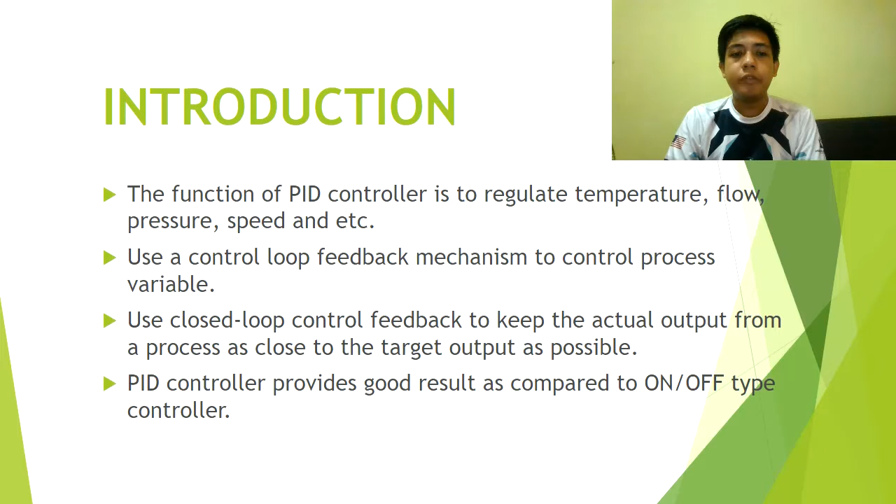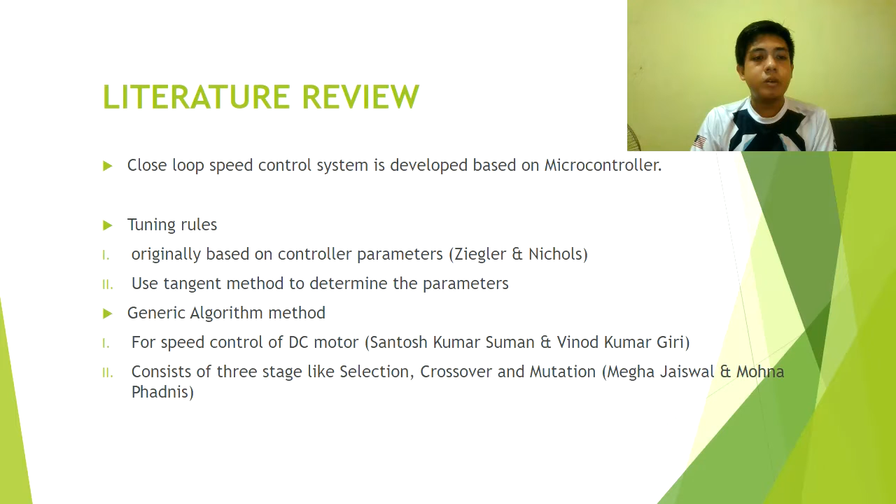The genetic algorithm method is used for speed control of DC motor and it consists of three stages: selection, crossover and mutation.

For Jaya Optimization Algorithm or JOA, this system is used for speed control of the DC motor. The JOA method can reduce the disadvantage of the traditional method, and the method is simple and does not require specific dependencies, because this algorithm is repeated until we get the best value of the parameter.

For the fuzzy neural method, it consists of four types: fuzzification, fuzzy inference system, rule-based and defuzzification. The fuzzy PID controller is used to control the brushless motor, and this method is a logical mathematical procedure based on if-then rule system.

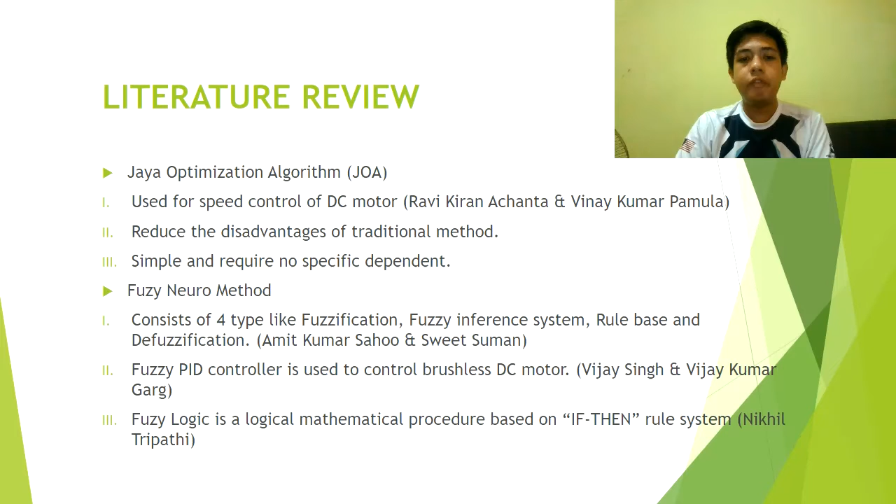The last part that I'm going to present is the problem elaboration. The group must follow this procedure in order to achieve all the objectives. The first step is we need to design the block diagram that satisfies the requirement given.

An electromechanical system is applied as an actuator in a control system for driving the blade. The next step is we need to derive the mathematical model and block diagram for the motor and blade as the load, and explain and solve the problem using control system theory, technique and concept.

Next, we need to use MATLAB Simulink to create and run the block diagram to get the result. Lastly, we must fill the table given in the instruction with the values from the results of the manual and auto tuning simulation. That's all for my part.

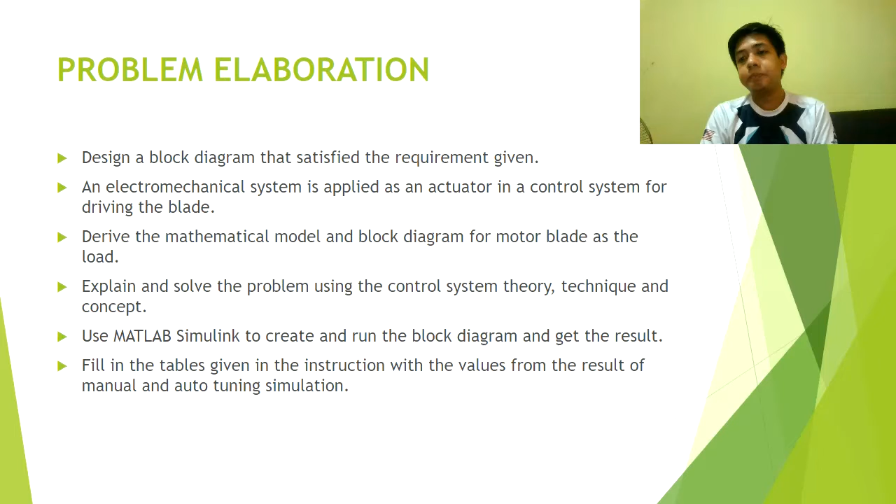So now I will present about problem execution and result. This is mathematical modeling. For the DC circuit equation: VA minus RA IA(S) minus LA multiplied by IA(S), minus ES, equal to 0.

This is the first equation, where ES is the back EMF. Since back EMF, ES, is directly proportional to the angular velocity of the motor, ES equals KB S theta(S). This is equation number 2.

And since torque is directly proportional to the current, T(S) equals KA IA(S), and this is equation number 3. Then substitute equations 2 and 3 into equation 1.

VA(S) minus IA bracket RA plus S LA, minus ES, equal to 0. Then we can get VA(S) minus T(S) over KA, multiplied by bracket RA plus S LA, minus by KB S theta(S), equal to 0.

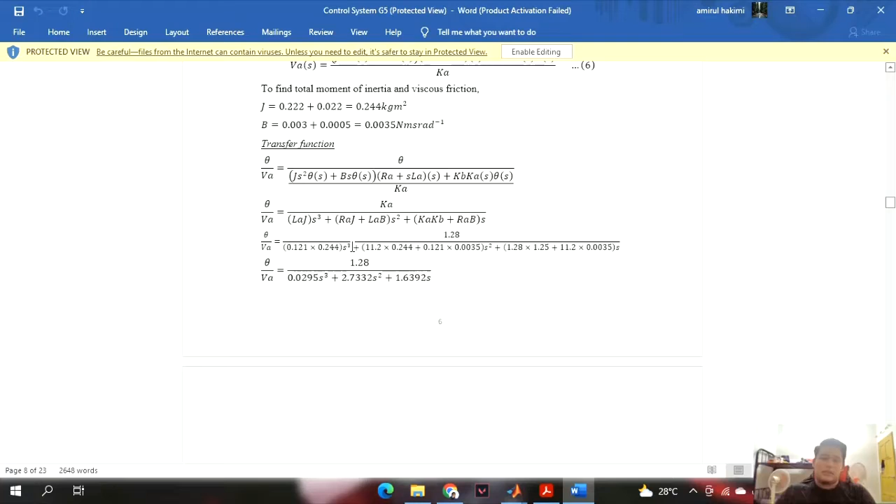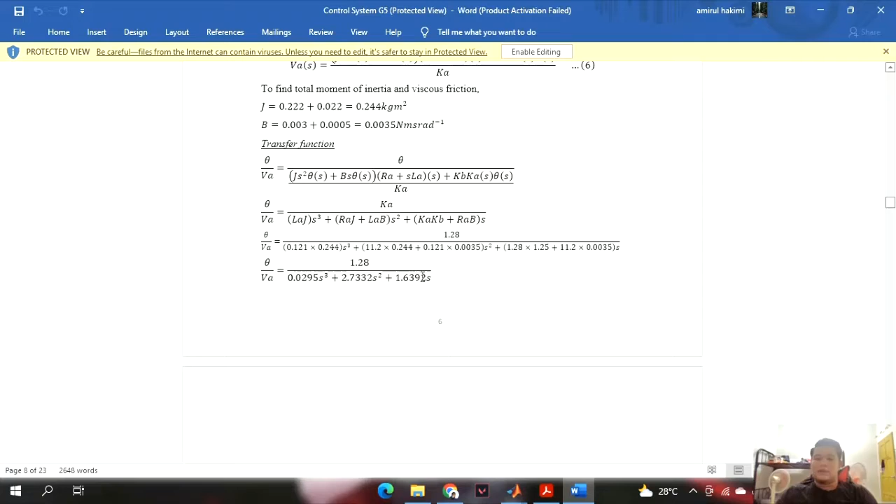After we substitute this below, we will get theta over VA equal to 1.28 over 0.0295 S cube plus 2.7332 S squared plus 1.6392 S. And this is a mathematical equation that we get.

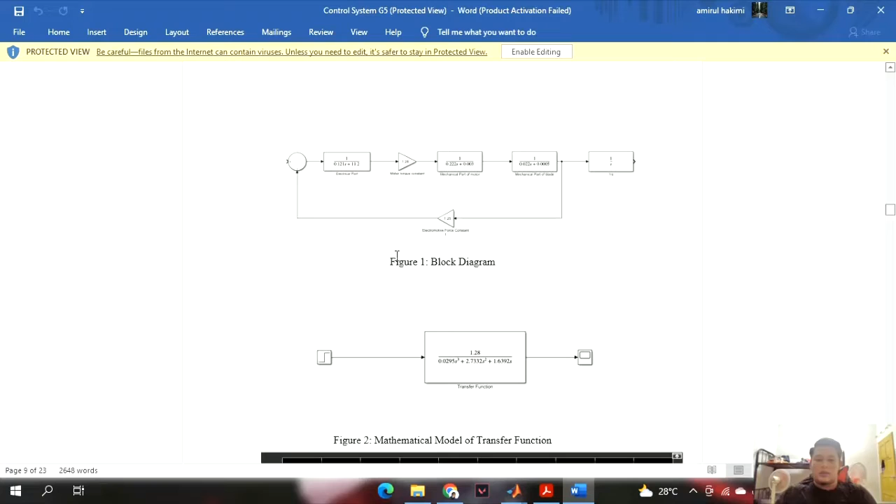And this is for the block diagram that we use in this assignment and in this project. And this is for the mathematical equation or mathematical model for transfer function, which is this is a step and this is a transfer function, and this is scope.

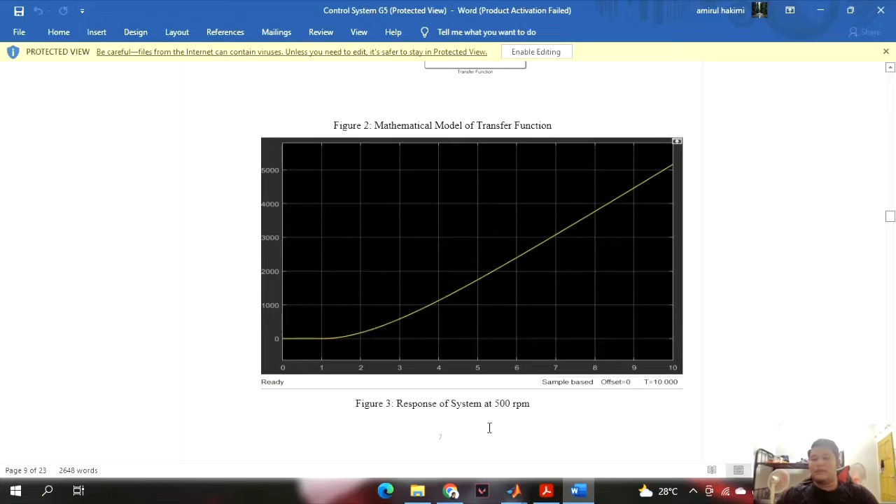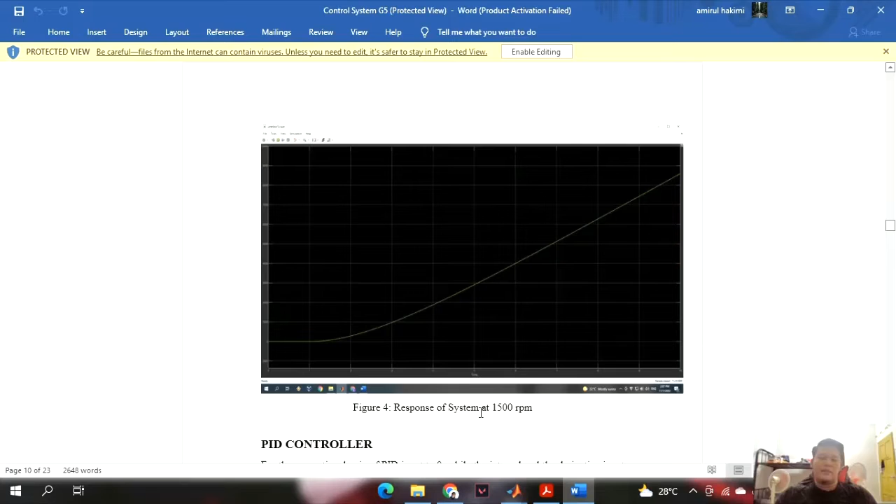This is a response of system at 500 RPM, and this is the result, the graph result for response of system at 1500 rotations per minute.

Okay, as you can see here, this is the circuit that I made in Simulink in lab, which is this.

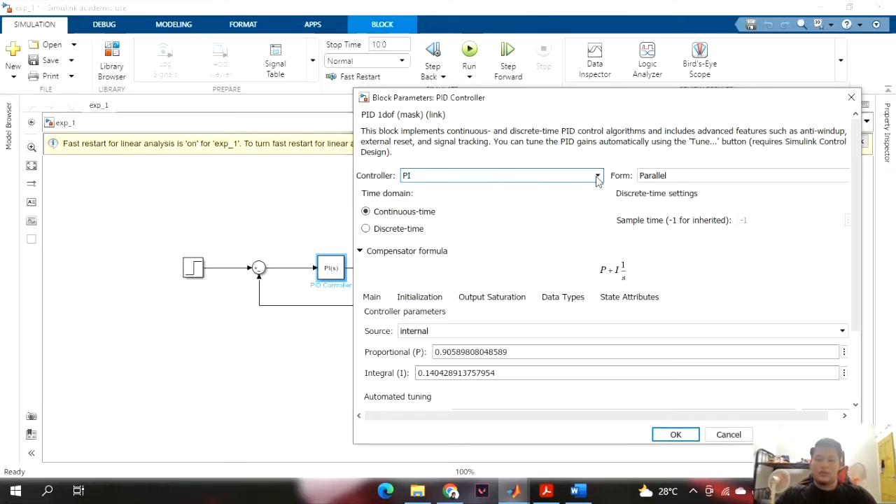If you want to find P, we will click this block, and we change it to P. Okay, and this we will set to 1. And then we click OK. So this is step, and for the proportional gain, for the PID controller, we will set P and set to the 1.

And this is for the mathematical equation that we get after we calculate, as I showed previously. After we set P equal to 1, Kp equal to 1, and we will get the graph like this.

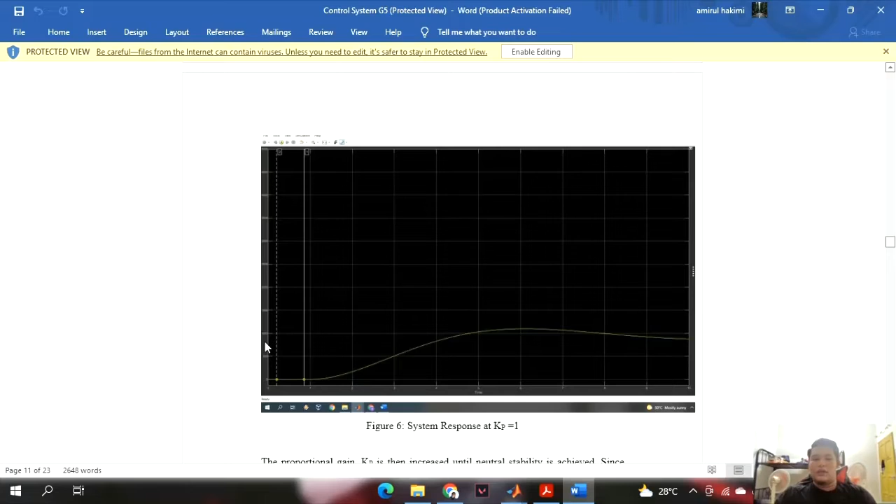The proportional gain Kp is increased until neutral stability is achieved. Since the derivative gain Kd and integral gain Ki is set to 0, the critical gain at neutral stability Kc is equal to proportional gain.

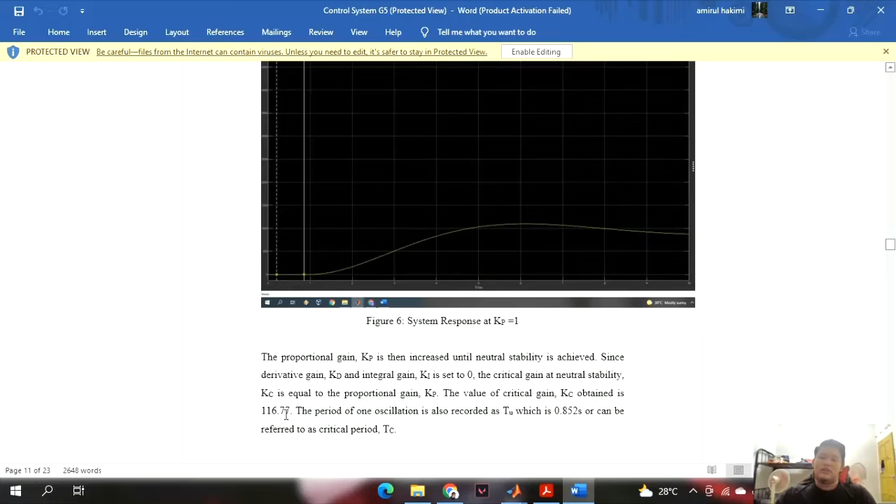And the Kc that we obtain in this explanation is 116.77, which is after we set Kp equal to 116.77, we will get the graph like this.

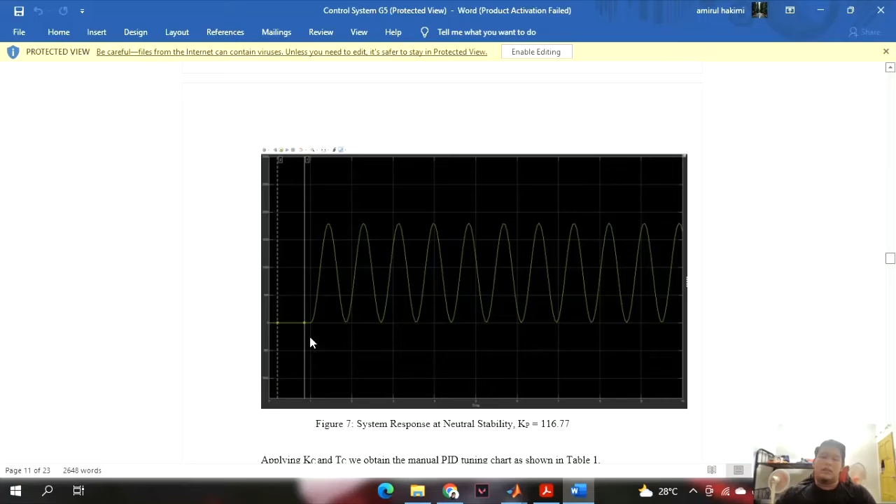After applying Kc and Tc, we obtain the manual PID tuning chart shown in table 1, which is P equal to 58.385, Pi equal to 52.

Kp, for the P we will get 58.385, and for the Pi we will get 52.5465, and PD we will get 93.416, and for the PID we will get 70.062, and for the I, for P we will get none, and for the Pi we will get 0.71, and for the PID we will get 0.426, and for the TD, which is for PD we will get 0.1065, and for the PID we will get 0.1065.

Okay, for the controller, this is the formula that we will use to find the Kp, which is Kp equal to 0.5 multiplied by Kc, and as you can see here, 0.5 multiplied by Kc, which is 116.77, which is we will get 58.385, this is we will get P.

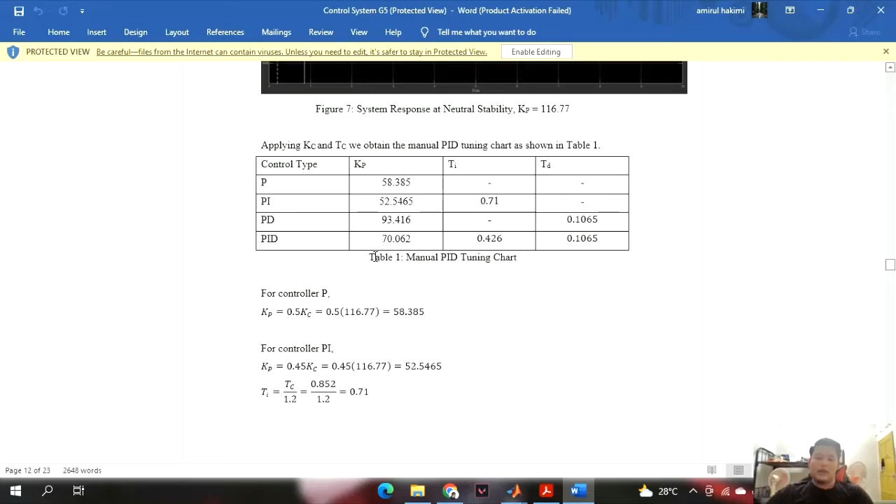And for the controller Pi, we also use the formula 0.45 multiplied by Kc, and then we will get like this, which is 52.5465.

And for the Ti, we will use a formula which is Tc over 1.2, which is 0.852, over 1.2, which is we will get 0.71.

For the controller PD, the formula that we use is 0.8 multiplied by Kc, and we will get 93.416.

And for the TD, the formula that we use is Tc over 8, which is we will get 0.1065. And for the controller PID, for the Kp, we use the formula 0.6 multiplied by Kc, and we will get...

70.062. And for the Ti, Tc over 2, which is we will get 0.426. And for the TD, Tc over 8, we will get 0.1065.

So this is table 1, which is proportional, integral, and derivative gain, which is manual.

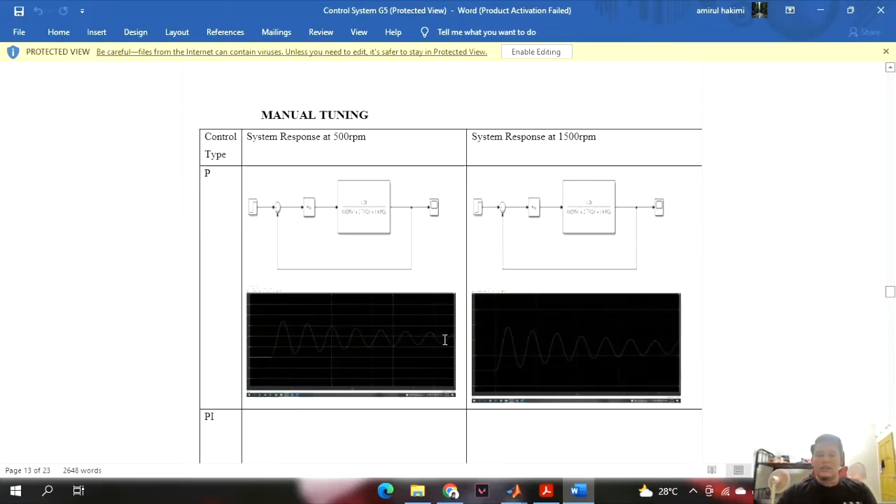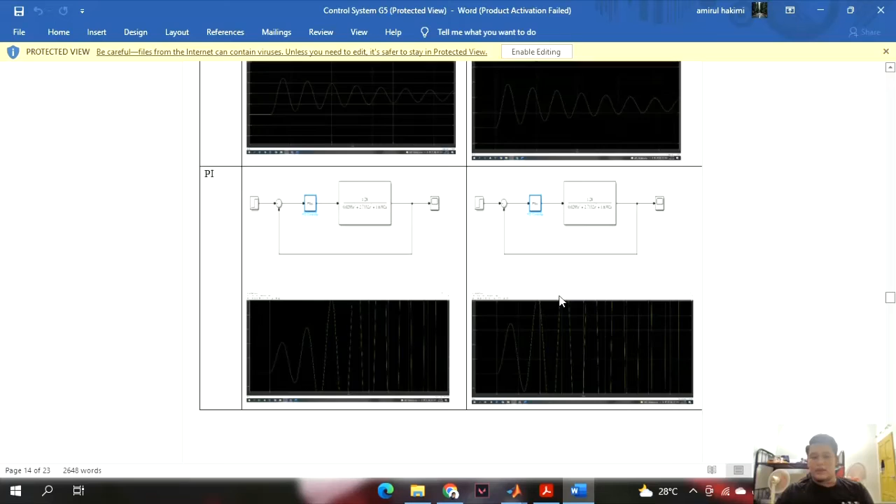This is the manual tuning that we get from the simulation that we run. When the system responds at 500 RPM for the P, this is the graph that we get, and this is system response at 1500 RPM, and this is the graph. And also for the PI, this is for 500 RPM, and this is for 1500 RPM.

As we can see here, the graph is a little bit different, this one is more peak, and this is less peak.

And for the PD, this is the graph for 500 RPM, which, as we can see here, has a small peak. And for the 1500 RPM graph, you will get a slightly bigger peak.

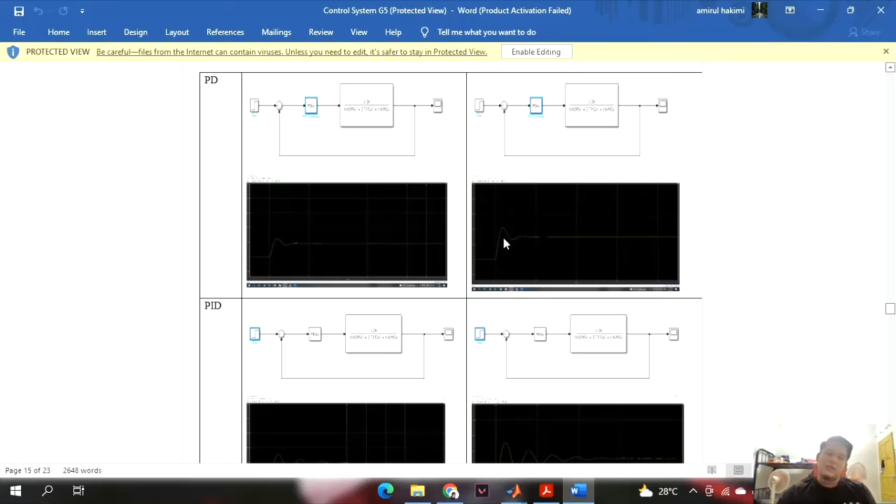And this is for the PID at 500 RPM. This is the graph. As we can see, it's a little bit smaller than the response at 1500 RPM.

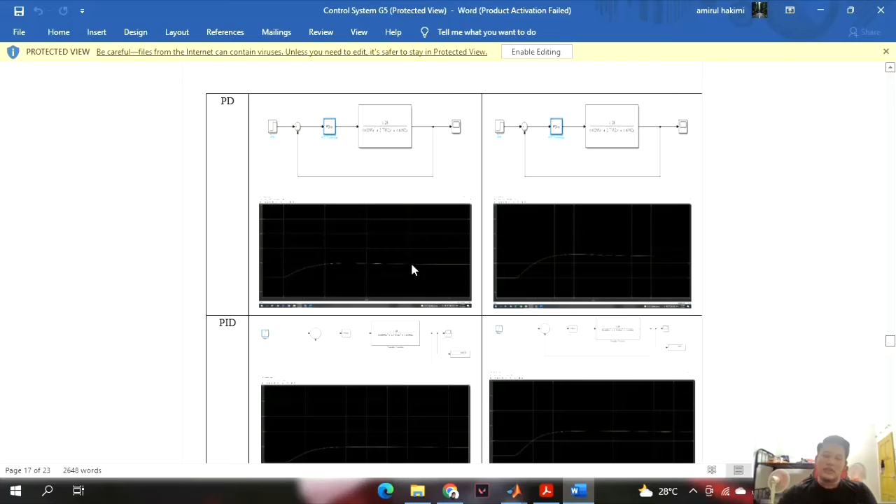And for the PI, for the auto tuning, for the 500 RPM we will get also like this, a little bit lower than 1500 RPM. And for the PD, also the same, for the 500 it's a little bit lower than 1500. And also the PID also same.

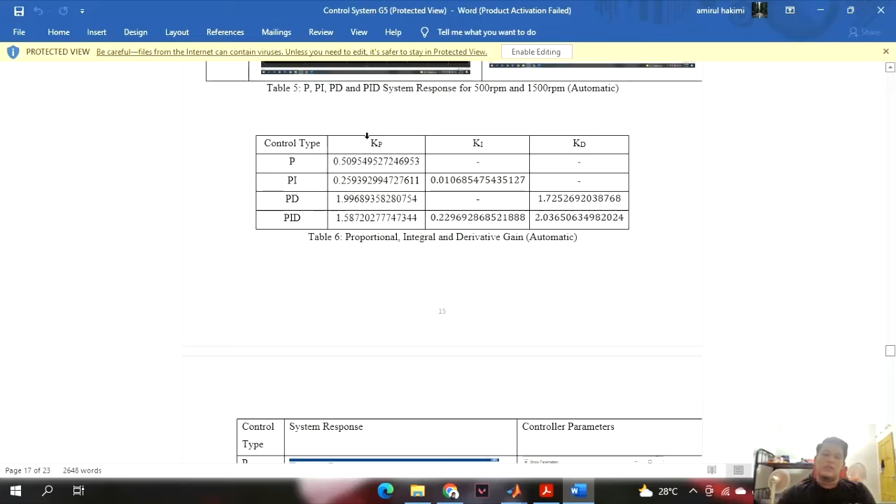So for the descriptors, proportional, integral, and derivative gain for the automatic tuning, as we can see here, this is the data that we get. Let me show you the data.

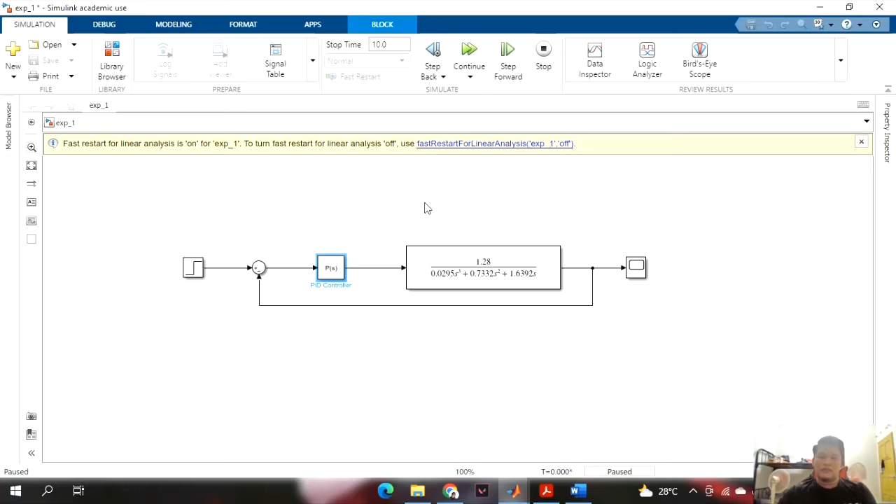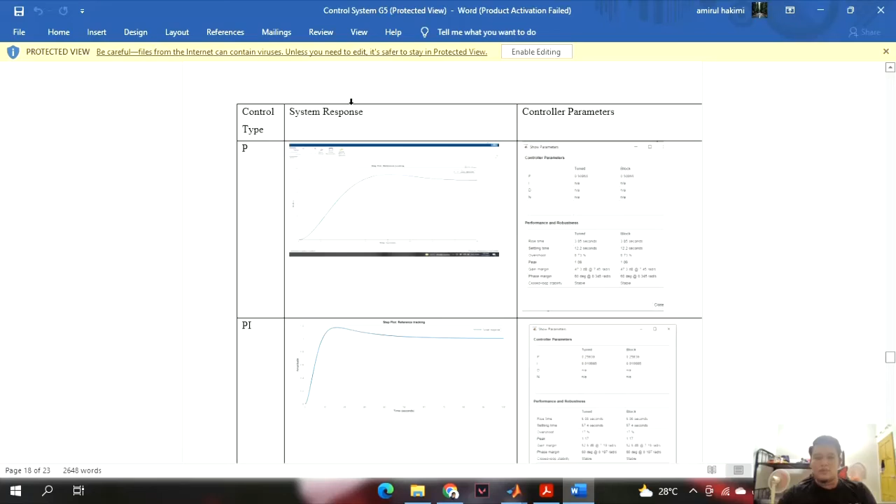I'm sorry, there's a little bit of a problem in my software simulation. But as we can see here, this is the automatic for the system response. This is the graph for the P control type, and this is for the controller parameter.

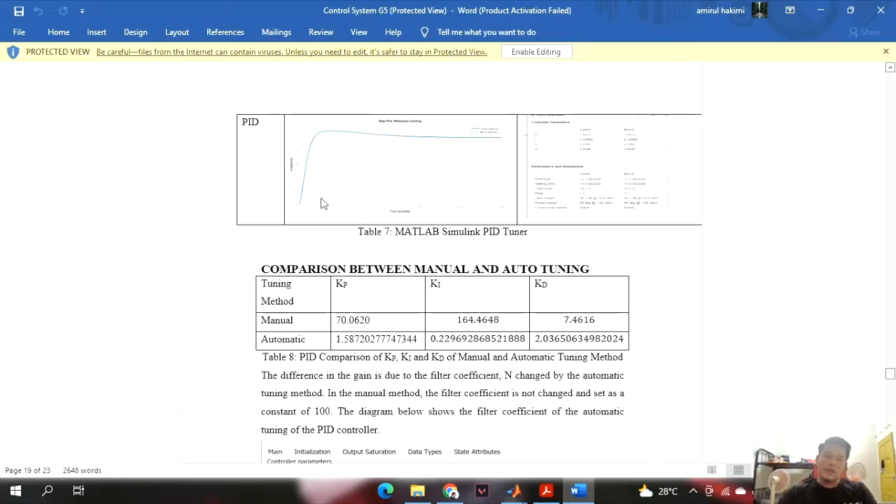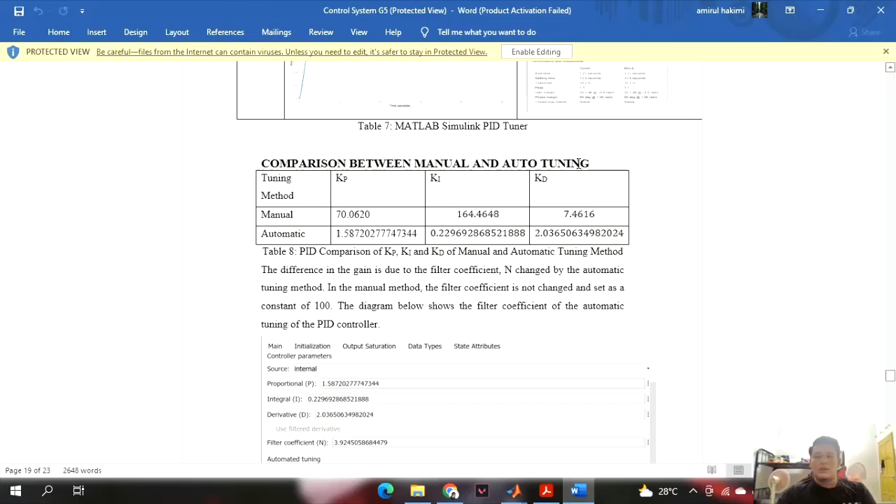And here is the comparison between manual and auto tuning. For the tuning method for KP, for the manual we will get 70.0620, and for the automatic we will get 1.58720277747344.

And for the KI tuning method, for the manual we will get 164.4648, and for the automatic the data we get is 0.229692868521888. And for the KD, for the manual tuning, we get 7.4616, and for the automatic tuning we will get 2.03650634982024. This is the comparison between manual tuning and automatic tuning.

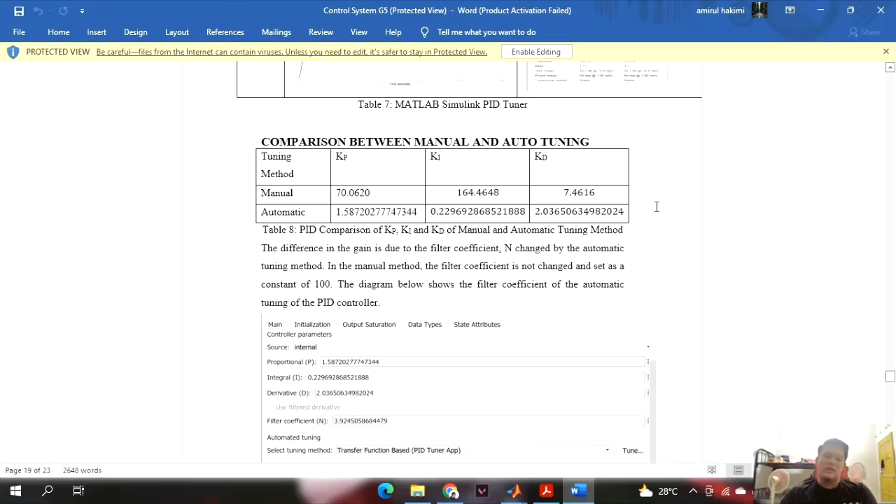The difference in gain is due to the filter coefficient, which is changed by the automatic tuning method, but in the manual method, the filter coefficient is not changed and is set as a constant 100. So this is the diagram for the filter coefficient of the automatic tuning method.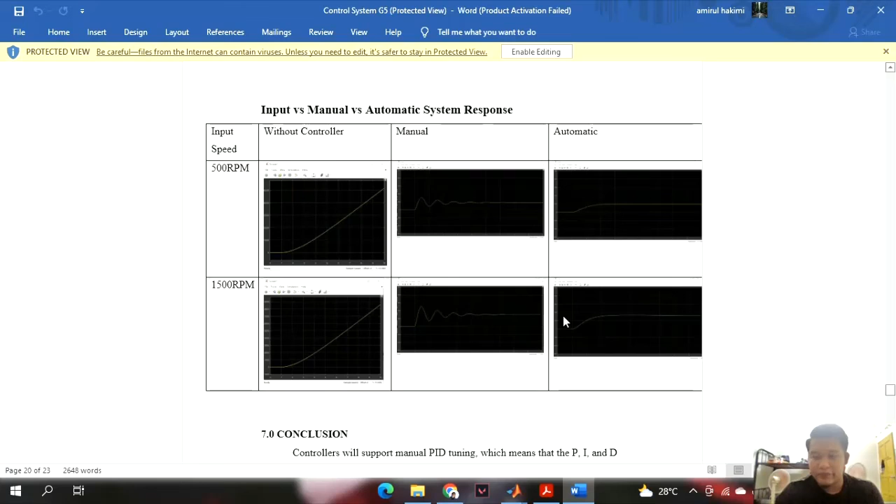So for the conclusion, the controller will support manual PID tuning, which means the P, I, and D variables must be calculated manually by the engineer and set via the controller menu. To perform this calculation, the user must have a reasonable degree of knowledge and understanding.

Manual PID tuning frequently necessitates some trial and error testing to obtain maximum efficiency. When compared to the alternative, manual tuning might be exceedingly time intensive.

Auto-tuning, also known as self-tuning of PID settings, is supported by the majority of current PID process controllers. The method this works depends on the manufacturer's product, but they often employ rule-based computation in the same manner as an expert engineer tuning the device manually.